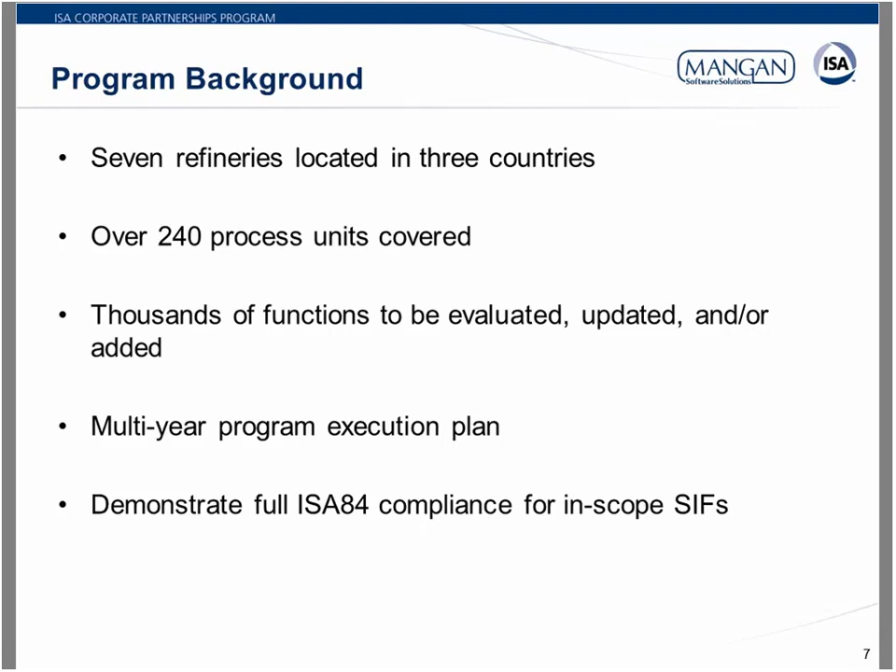So one more piece of background here. One of the things that was immediately recognized with this sort of brownfield program is that you already have a lot of safety functions. Many of those functions are not originally designed to ISA84. Other functions may have been originally designed to ISA84, but perhaps have not been maintained per life cycle requirements. And so it's a challenge to know how to start, how to take the first bite out of the elephant, so to speak. And so we landed on a 2-pronged approach.

Phase 1 we'll call operate and maintain phase, and phase 2, which is the capital program. So the idea of the phase 1 operation is to set up that sustainability organization and establish the work processes that are going to ensure long-term success. And then once those organizations are established, start ensuring that the existing functions are documented and tested, and start gathering prior use data to demonstrate that we are meeting minimum safety requirements.

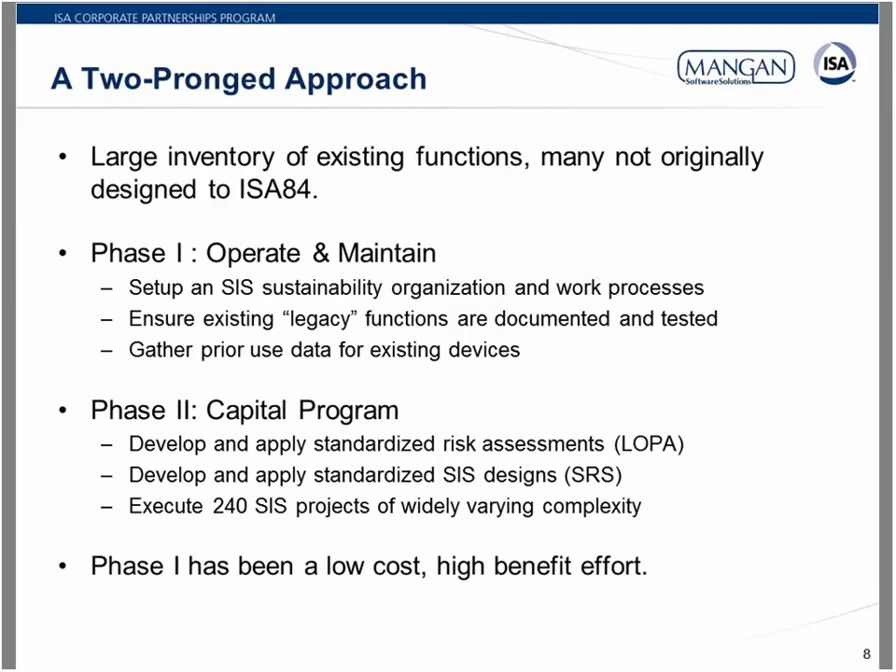So we will see that when we look at the tool that was delivered later on in the presentation. Okay, thanks, Alaric. So with that, we're going to move to our first poll question.

So Alaric. All right, folks, now that we've kicked off the presentation, we kind of want to calibrate ourselves with the audience and kind of clue ourselves into why everybody dialed in. And certainly we appreciate you joining us. But for this first question, we want to poll you to see if you are undergoing a similar safety lifecycle journey. So please select whatever option applies for you there.

And where applicable, is or was your experience in terms of greenfield or brownfield projects? So we'll just take a couple minutes here and let you guys answer those poll questions.

So rather than sit here in silence while you answer the poll, I just wanted to add that for those of you that want more information on this, Chevron did a presentation of the overall program at last year's ISA Safety Symposium, and that's available on the ISA website.

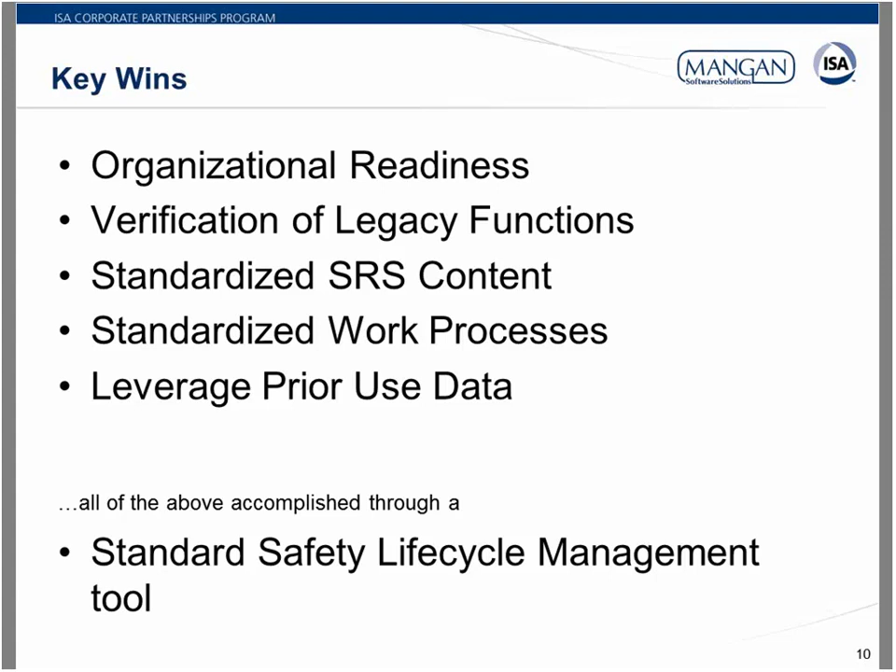So starting off, design of the SIS organization. So one of the things that we recognized early on was that the skills of SIS testing and maintenance are not the same as basic E&I skills. For example, knowledge of common mode failures, the importance of proof test coverage, et cetera. These are not things that are in the basic E&I toolkit. And so the first step for us was defining these required skills and competencies and starting to track them.

And to facilitate that, we created designated SIS O&M coordinators at each site, and also SIS engineers, and then a dedicated SIS group reporting to the M&R organization. And then subtly but very, very importantly, originally many of these teams were based out of technical organizations, which with the history of SIS, it kind of originated out of technical organizations, and that knowledge has stayed in the technical organizations.

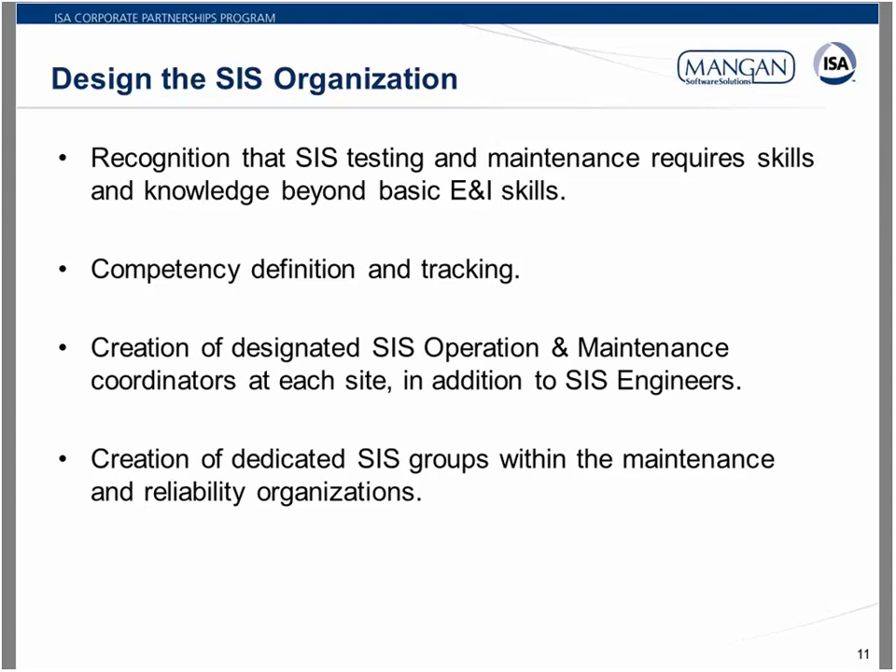Verification of legacy functions. So I started off earlier by stating that we have a large inventory of existing functions, which we just generically call legacy instrumented functions. Many of them are clearly safety functions, although they may or may not have a formal risk assessment to back that up. Others, it's unclear whether there should be safety functions, and we await a risk assessment to back that up.

And so ultimately, the first problem is simply to record all of these protective functions and document them as carefully as we can. And only then, after we've gathered the data, can you make a decision on what happens to that legacy function. Options being to grandfather the function, to replace it, or ultimately to decommission it.

And one of the challenges that we faced with our centralized program is we need a standard process to ensure that, number one, we're making the right decision on these, and number two, that we're making the same decision from site to site in a consistent and efficient way. And then in the interim, we have the problem of how do we do our due diligence to make sure that we're providing adequate safety. And one of the key questions there is about testing frequency.

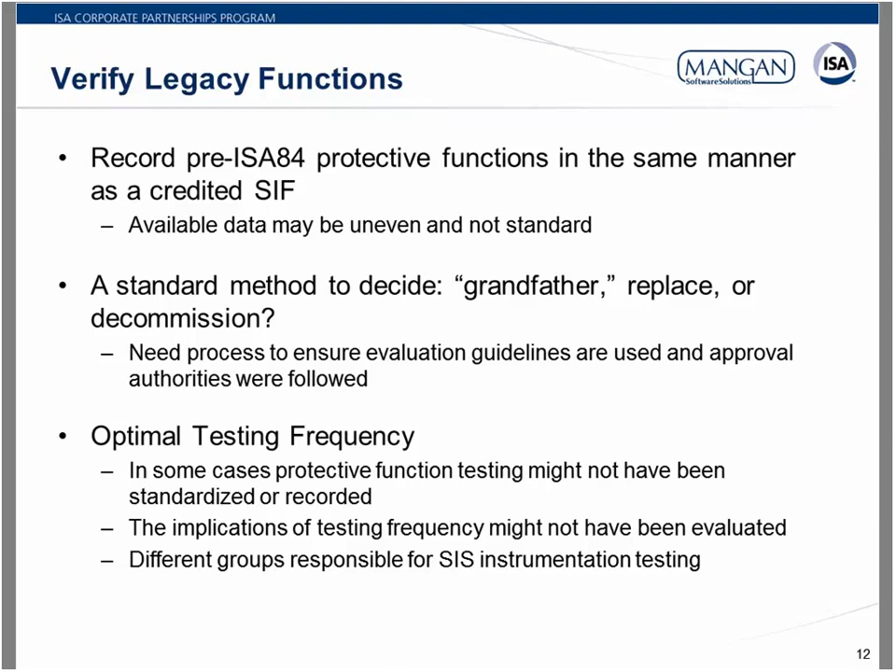The next challenge we faced was what does an SRS look like? And for anybody that's worked on a safety requirements specification before, you already know that frequently an SRS is not a single document. It's multiple pieces of information that could live in multiple systems. Many of these systems are really outside of the scope of control of the SIS engineer.

The example I give here is P&IDs. Obviously, the P&IDs are an important reference for the SRS. We want to ensure that if the P&IDs change, that it stays consistent with the SRS, but we simply can't take ownership of the P&IDs. It's out of our control.

And you could go on and list many, many other items in here, from cause and effect to loop diagrams and so on. And so what you need is more than a document, but a way to integrate all of the required information into one place. And beyond that, we want it integrated in a standard way.

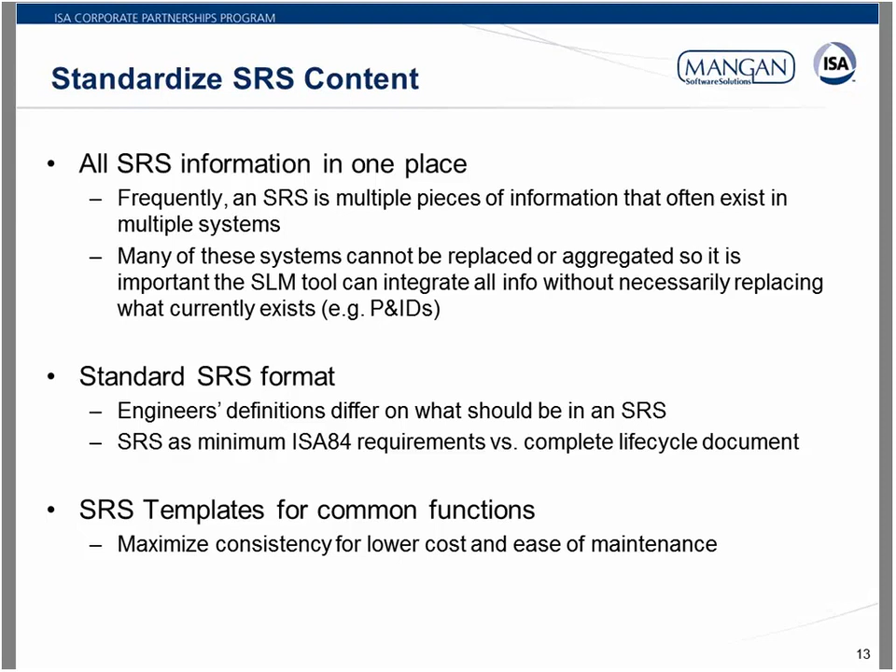Thank you, Alaric. As I hinted at on the previous slide, something that goes hand in hand with the standardized SRS are the standard work processes to support it. And I think this is one of those aspects of life cycle management where many organizations fall down. A big part of the ISA84 standard is about the required verifications and functional safety assessments that have to be performed. And obviously we want to perform those in a consistent way that will allow us to demonstrate compliance years after the initial project.

So the key requirements here are we're looking for a structured method. We want every verification and every FSA to cover the same minimum items, to have the same structure, and to have the same, let's say, the same types of participants. They're required participants with required competencies on these work processes. And then finally, we need that standard revision tracking and approval flows to make sure that the system that we set up initially continues to be followed in the long term. And then to audit that, we have a deviation process to support that.

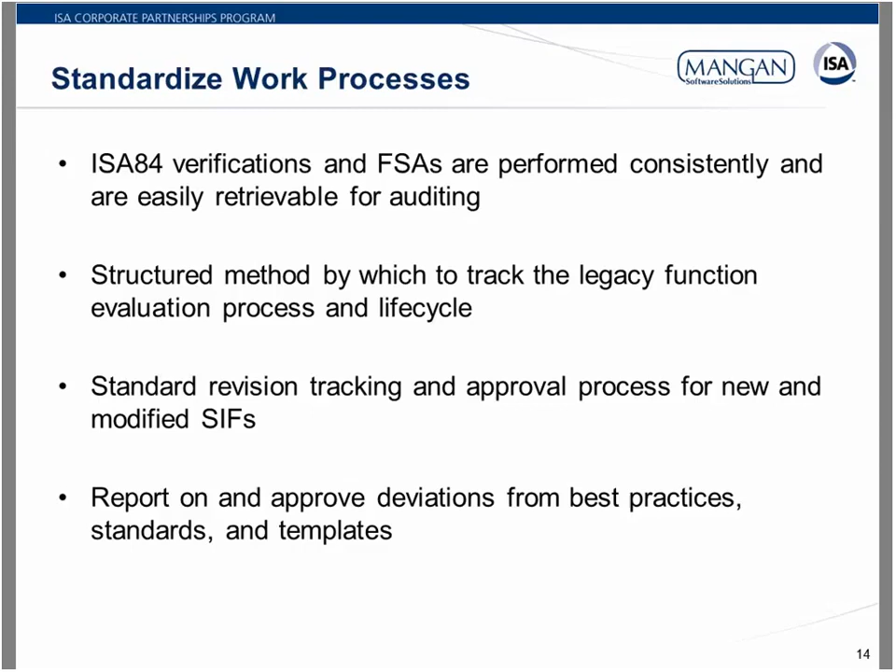So I feel like now that we're doing the presentation live, I've just been laying out a laundry list of problems for the last 10 minutes. So this is the last slide of problems, and then I promise that we're going to get into solutions shortly. So finally here, prior use data. It looks so easy, but it's not.

What we found is that even if our operations and maintenance organization have been performing testing, there's no mechanism for collecting and analyzing that data. It may go into a maintenance management system, it may go into a file cabinet, but one thing it definitely doesn't do is magically transform into prior use data for SIS engineers.

So we need a standard way to group and categorize devices, because prior use data applies to specific devices in specific services. We need a standard way to analyze the data and approve the data. And finally, the overall process needs to be as automatic as possible, because experience tells us that if gathering prior use data is hard, it likely just won't happen. And so why do we want this? Initially, of course, we want more accurate SIL calculations.

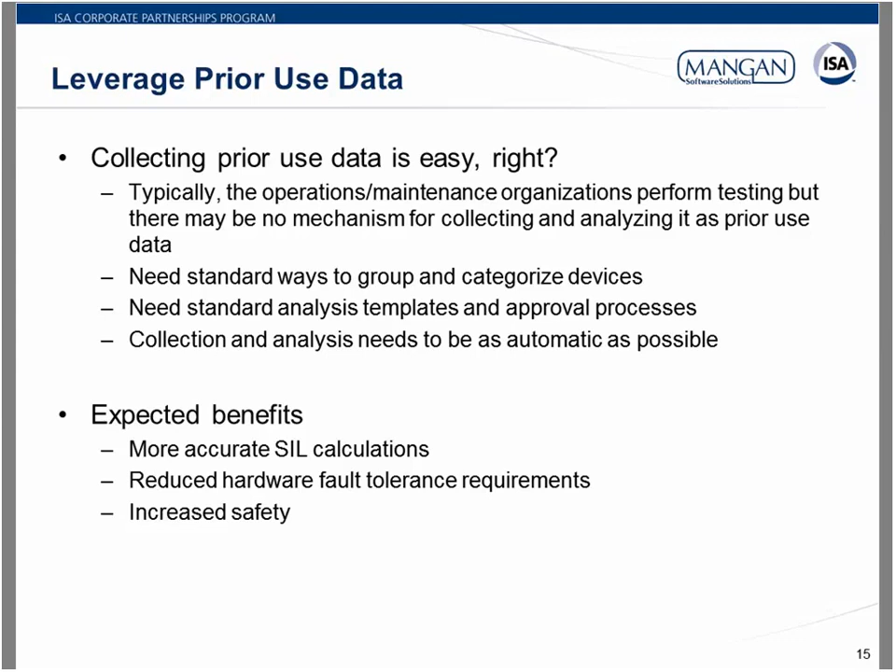So Alaric, any comments here? No comments here. I think we can press on. Okay. So now we are going to move into our second poll.

Go ahead, Alaric. So speaking of a laundry list of problems, with this next poll, we do want to understand for the audience which of the previously mentioned aspects are most important to you. And with this one, please select all of those options that apply. What we hope to see with that first question is, are we far off the mark? Are we chasing the correct targets here, with regards to your opinion? Stephen and the leadership at Global Manufacturing, they've come to the understanding in speaking with other SIS leaders that they are, in fact, not alone in worrying about these various topics.

And then for the second question, I want you to think about how many different databases, systems, or programs you require to demonstrate this standards compliance. For instance, where do you keep your loop drawings? Where do you keep your logic solver programs or calibration certificates? My suspicion here is that if you really map out where these things live in your organization, we'll see those responses creep higher to the 3 or 4 or greater than 4 options. Yeah, and quite honestly, I don't want to influence your responses, but I'll be very surprised if a lot of people say one system, because what we found is the reality is that's just really hard. You're always going to have to live with multiple systems that will have to work together.

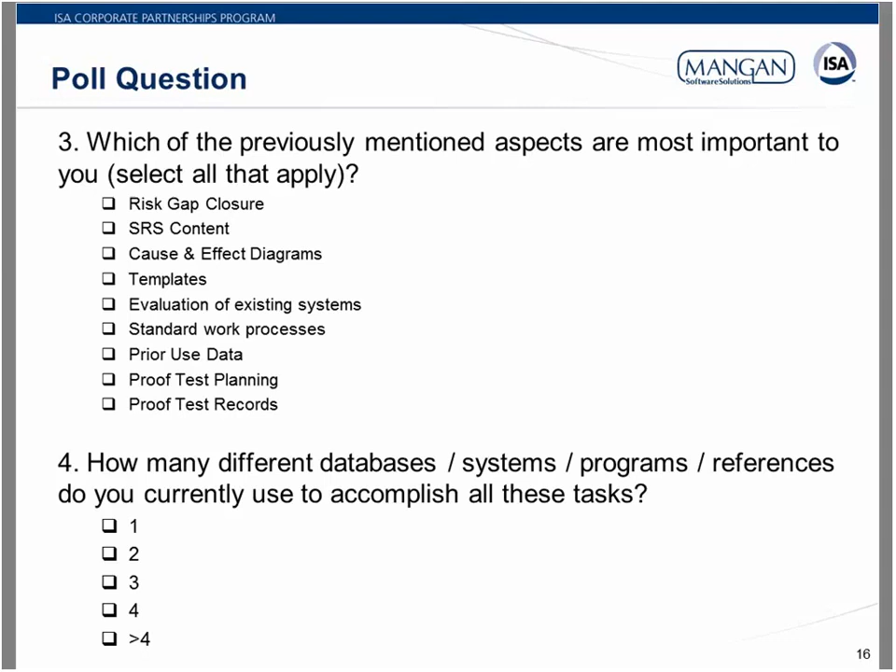So since we're running a little bit behind, why don't I move to the next slide while the poll's still open, and Alaric can give the overview of the next part of the presentation, then we'll come back to the poll results. Okay. Oh, they just popped in.

So take it. Okay, well, I'm scanning the results on question 3 there, and we're seeing greater than 30% indication for almost every one of those options. And it looks like option D there, which is templates, has the lowest response rate. Kind of interesting. We have a couple slides on the use of templates. Maybe we can change people's minds there. But certainly the highest one looks like the evaluation of existing systems. Yeah, that's interesting to see and makes me feel good that it's a common problem. Everybody's in the same boat, and I think we're going to show in the next section some powerful ways to manage that process.

And on the templates, it's too bad that we can't elicit responses, but I wonder if the templates are not so important to people because a lot of people already have them. That's based on my talking to people at other companies. The templates have been around for a while in some form or another, and so I think what's a little more unique for us is the focus on the overall life cycle and taking our existing functions and bringing them into compliance. Agreed. And the other one that jumps out to me there is the 56% response rate on SRS content.

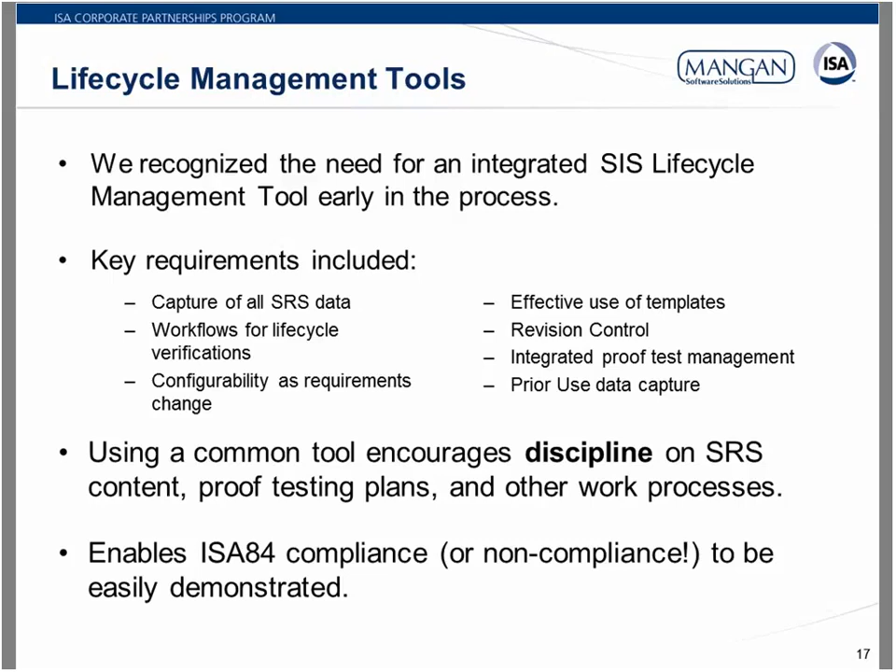And in our case, we started with a week-long conference room workshop in which we gathered global manufacturing's corporate and technical leadership, the refinery's SIS coordinators, and the organization's IT project management, along with our team, to review the program's key requirements and then really talk about the nuts and bolts of how to achieve them. Right, so our discussions ranged from database structures to SRS formats and anywhere from project workflows to application hosting.

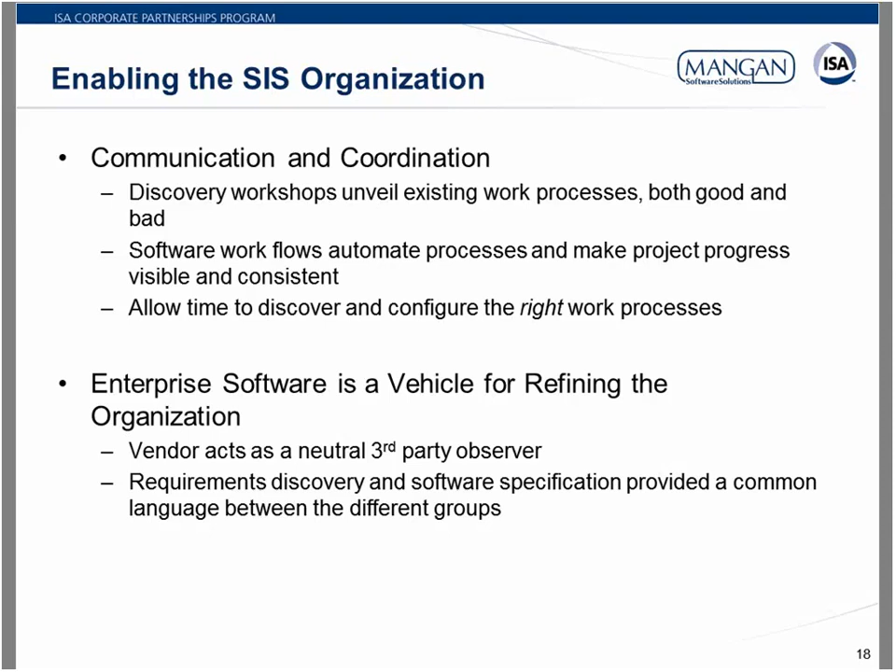Any other comments, Stephen? No, I think we can move on.

Oh, yeah. Although I call it a day in the life of an SIS organization, it really illustrates how we mapped the life of a safety function from conception all the way to decommissioning.

Somebody is not on mute.

But again, before I proceed, I want to deliver a sense of scope. Through the discovery process, we took what was effectively 1 page of requirements, and Stephen and I and a couple other members of the organization mapped it into 10 pages worth of workflow. Now, we don't show it in the presentation, but all of those software touch points identified in the workflow eventually became 73 pages of software requirements.

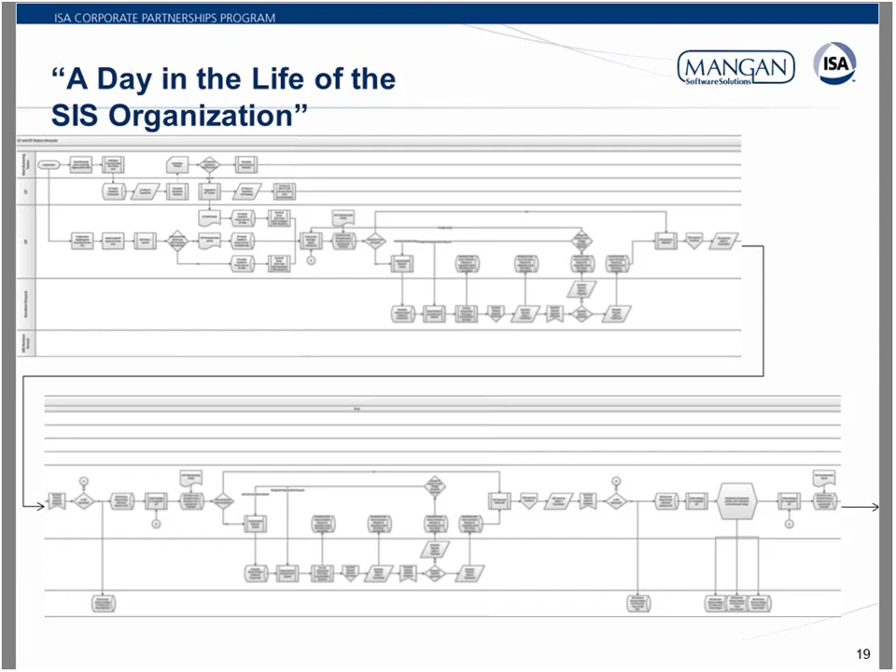Right, so the lesson learned should be this. If you can't diagram your work processes at this level of detail, you won't be able to configure them into the software and get the tool that'll help you along the safety lifecycle journey.

And then the 2 of those, plus myself, share a staging instance which acts like a sandbox, really, in which either group can test new configurations for the software. Now, providing the separate instances, I hope you understand, is an elegant solution to handling the 2 distinct yet parallel program workflows within that safety lifecycle journey.

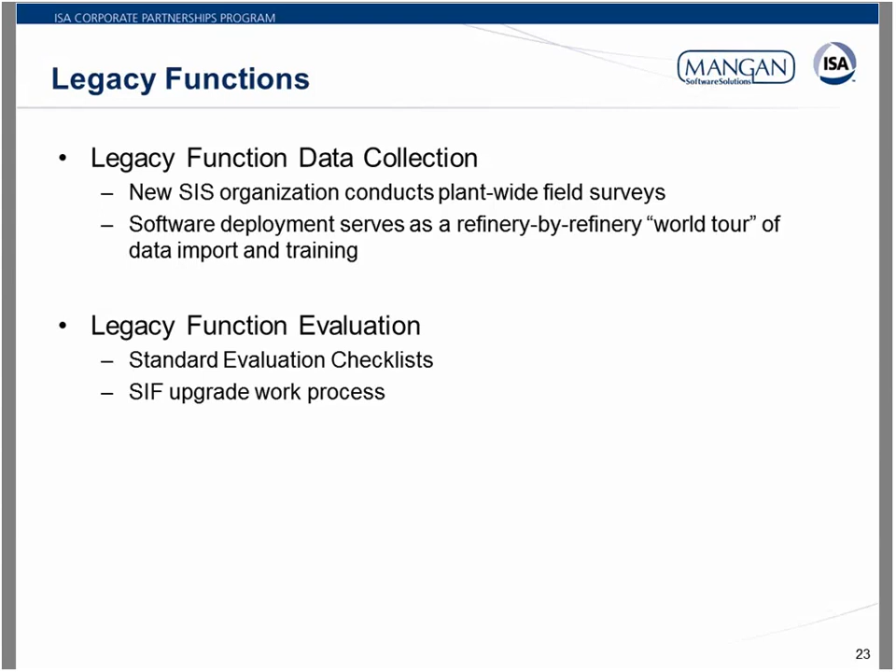Now that the data was all in standard form, it could be put through an evaluation process. So on the next couple slides, we'll talk about the use of evaluation checklists and then what we call upgrade or decommission workflows that are made available in the application. All right, so we're going to zoom in a little bit on our lifecycle workflow and just want to point out that the initial phase 1 efforts occur at the very beginning.

And with this screen capture, I want to show you how we configured the application to handle legacy function data in what I call an SRS-like manner. Now, as Stephen would say, the legacy function itself is just an interim state. The organization doesn't intend on keeping legacy functions as they are. And instead, on a function-by-function basis, they're going to make the determination whether to keep and take credit for or otherwise decommission the function. So it makes sense then to organize the legacy data in a manner closely resembling what it might become, such as the safety requirement specification structure like you see here.

And again, I want to stress the degree of adaptation involved. My team and I changed a software platform used primarily as a compliance tool to, in this case, accommodate admittedly pre-compliant data entries. Stephen? Yeah, that's a good point, Alaric.

We should emphasize that the legacy function from a software perspective was a new object that the system had to learn how to deal with in a system that dealt with SIFs. And one other thing I'd like to point out is we say SRS-like data. Specifically, it's a subset of the SRS data because, as Alaric said, the LIF, the legacy function, is just a temporary state. It either eventually becomes a compliant SIF or it's decommissioned.

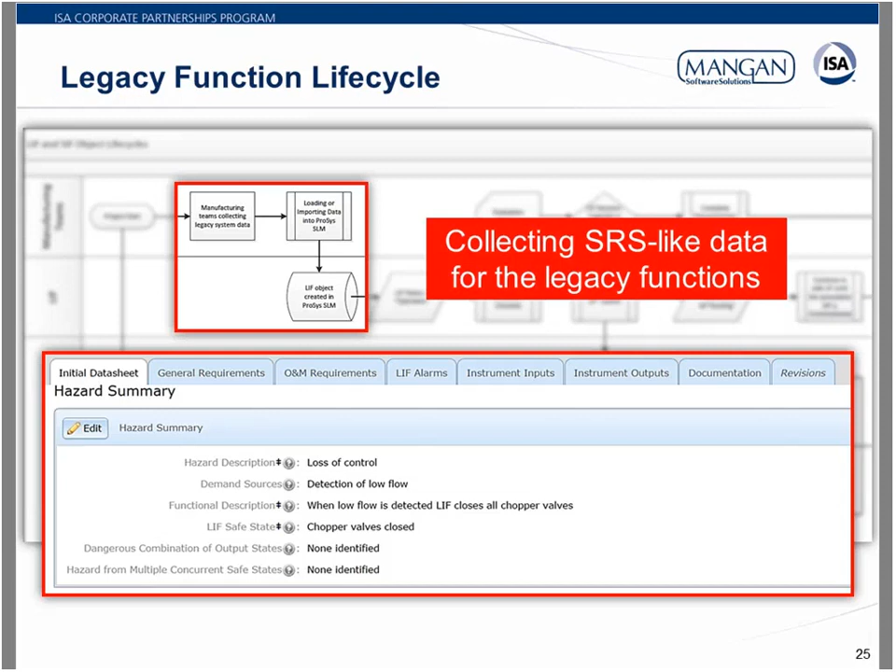So rather than reinvent the wheel, we simply took a subset of the data that you would expect for a compliant SIF and used that as the basis for our legacy function documentation. So on this next slide, we talk about what happens to the legacy functions while they're being evaluated in that interim state, right? And this is such an important key requirement stated for the organization that I'm actually quoting a senior member of the global manufacturing team with that slide title of Test Baby Test, right?

Now, here again, you'll see the benefits of employing a common software tool across an organization like this, where testing procedures or frequency may not have been previously identified. The Phase 1 teams could now specify nominal testing frequencies and establish some form of standard test procedure across the enterprise.

Now, standardizing test procedures was one of the expected positive outcomes of the effort, but as the refinery SIS organizations adopted the software platform and really started taking ownership of SIS testing, which in some cases was for the first time, they opened the door for further management discussion, and then really started asking questions like, how do we record demands? How do we approve or manage bypasses, right? So you kind of see here that they're starting to formulate the management of the operate and maintain phase of the safety lifecycle.

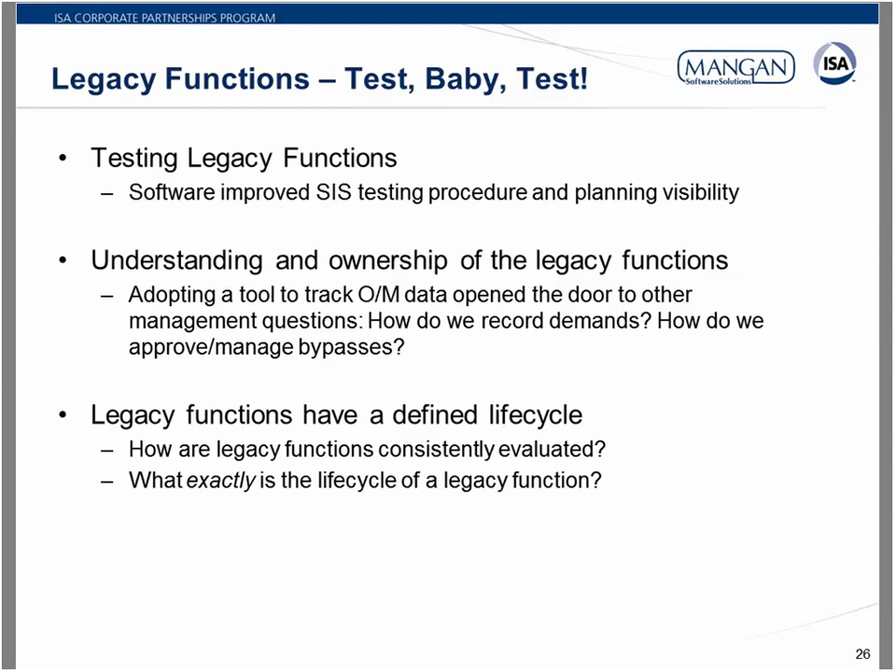And what this is representing is the next leg of that, where we found that it was very effective to raise the visibility of those data metrics, and now we're making the effort to make it more automatic, more reproducible, and more likely to last into the long term. Very good. Thanks. Very good points there. So in a couple of slides, we'll address where the life cycle for a legacy function eventually goes. But first, on this next slide, let's take a look at the outcome of this initial effort.

All right, so this slide shows a screen capture of what we call the operate and maintain module out of the SLM software, wherein you see the collection of test groups, or you could think procedures, and an example list of the legacy functions covered by that test. And just as a quick note, all of this information has been made anonymous for the presentation.

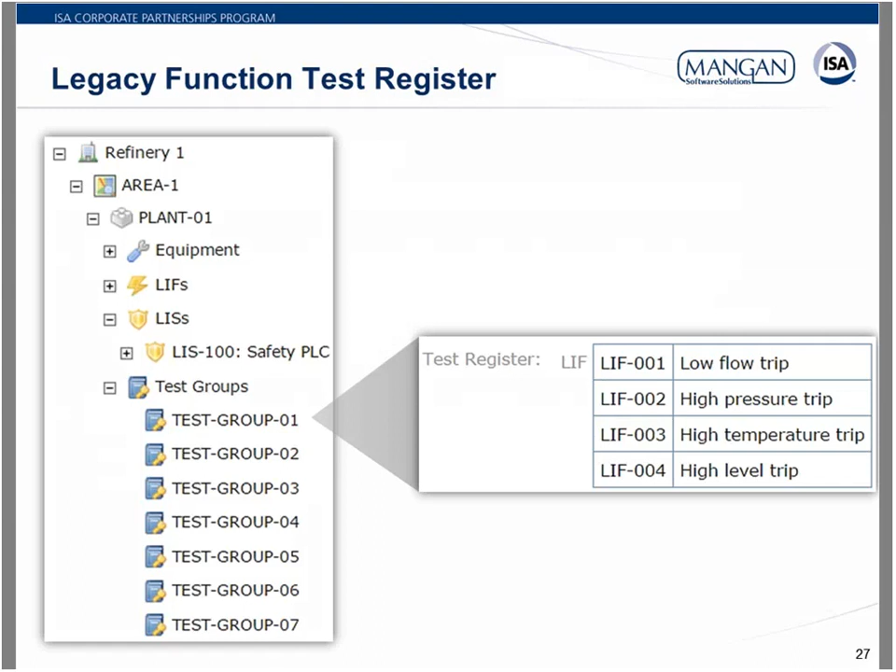Now at this point, the Phase 1 refinery teams have recorded in very standard form the legacy functions that are in place. They've kicked off an enterprise operate and maintain program, and now it's time to move forward in the evaluation of legacy functions. So I would just like to very quickly add here something I should have mentioned earlier.

If we have a legacy function in place and we are shooting for full ISA84 compliance, that doesn't necessarily require a rip out and replace of what's there. In some cases, compliance is a paperwork exercise to make sure that your documentations and your procedures and your verifications and validations have been done. And in those cases, all of the work for defining test procedures and gathering data for the legacy functions is immediately transferable to the ultimate compliant SIF.

You got it. Very good comment there, because as we move along the program workflow, we actually get to those steps and sub-steps which drive what I call the final determination of a legacy function. So we're going to be looking in on some closer points in the workflow.

Right, so as Stephen kind of alluded to, that final determination begins with the completion of a 21-item evaluation checklist, which you see represented in the screen captures from the software here. And again, I did blur out the individual checklist line items to protect their evaluation criteria.

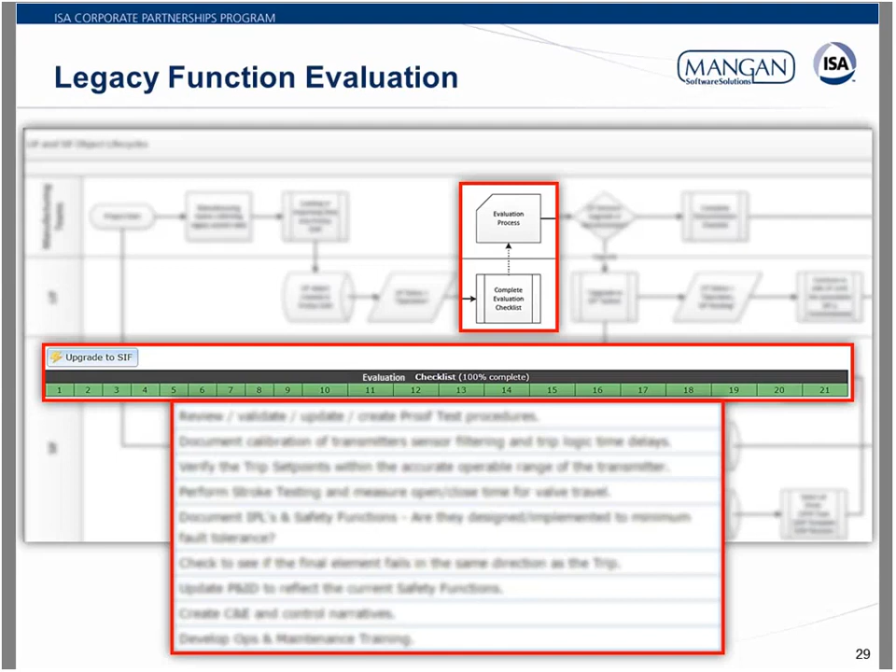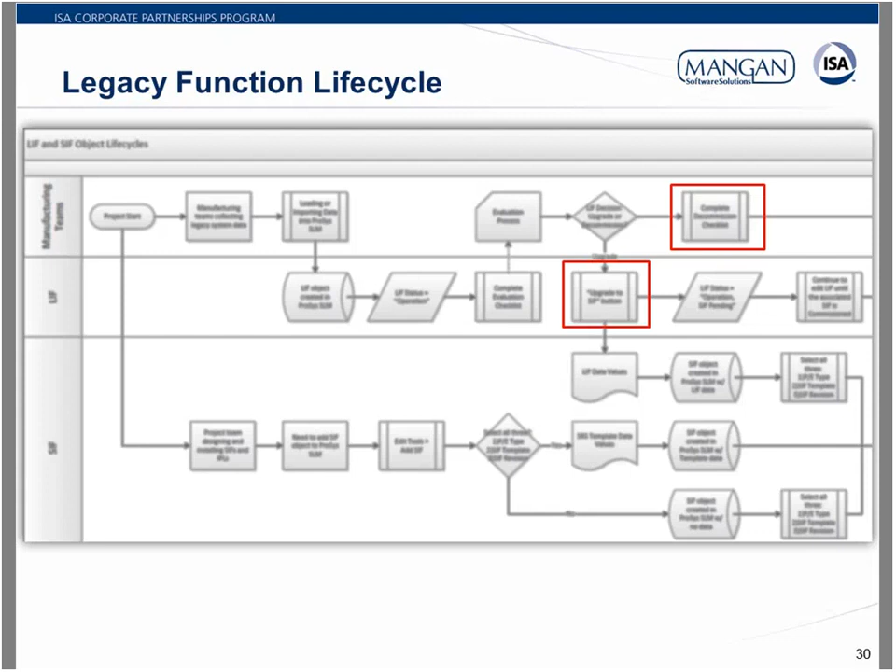Right, so as we move along this lifecycle workflow, you see there's a couple different paths that we can follow and lead towards the eventual end of the interim state, which is the legacy function. Right, so zooming in here on the workflow, we have ultimately two options for resolving that legacy function. Number one of which is considering the function creditable and then eventually ascribing some SIL level to it. Right, in the software, this involves a workflow to what we call upgrade the database object to a safety function.

Path number two would be to take no credit for the function and in some way, shape, or form decommission it. Right, in the application, this would archive the functional data that had been built up to this point. Now, either option involves workflows which are managed by stage gate checklists in the software, which you see in these other screen captures.

Now, you don't see the application logic in this section of the workflow, but in those instances where a legacy function is upgraded to a credited safety function, we tied the commissioning of the ISA84 compliant function to the subsequent decommissioning of the related legacy function within the database.

Like Stephen said, some of the equipment may remain, but at least in the database we make that change. So this creates a figurative switch that gets flipped between the pre-verification function in phase one and the ISA84 compliant safety function verified by phase two.

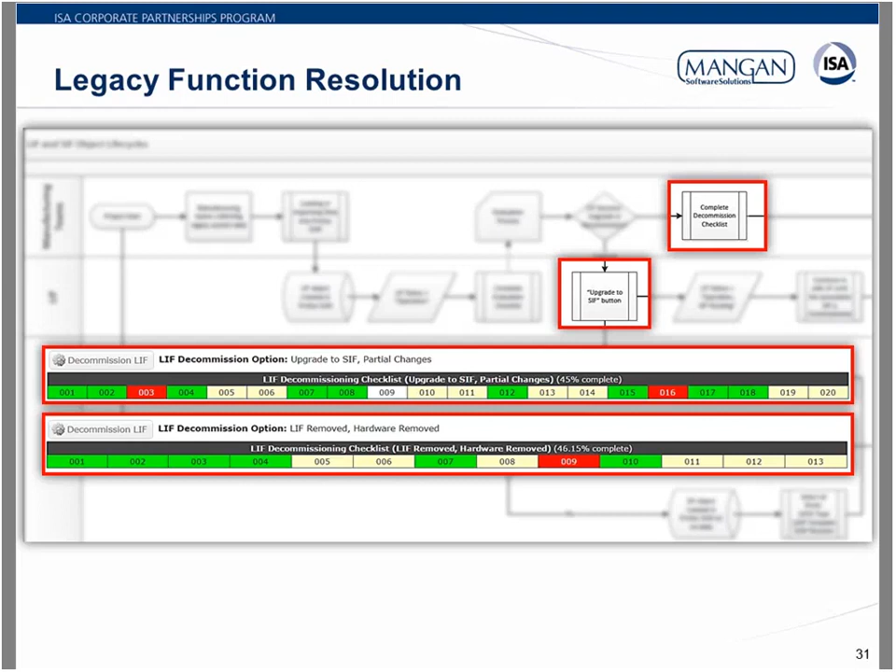So we've run the legacy function to its quote-unquote end, and that's where we can talk about the phase two activities. Phase two begins with the development of what we call SRS templates, and then continues with the specification of the project SIFs. This is done in the separate phase two instance, where you see a different mentality. The phase one team is working with what they've got, so to speak. In this case, the phase two team needs to achieve consistency and efficiency, which Stephen mentioned earlier, and that'll be through the standardization of SRS content.

We supported that effort by configuring the software application with features like custom fields, workflows, reports. We'll talk about some of those in the upcoming slides. But what's also important is the creation of what we call enterprise templates, defined by the central engineering team to provide a baseline of standard data which speeds up the development of actual SIF SRSs.

And this is where Stephen mentions the approximate 25-to-1 leverage in creating the thousands of project SIFs during the program. We're also going to see how Phase 2 reports on SIF deviations can be created based on these standardized templates. Stephen, any comments? No, let's move forward to the example.

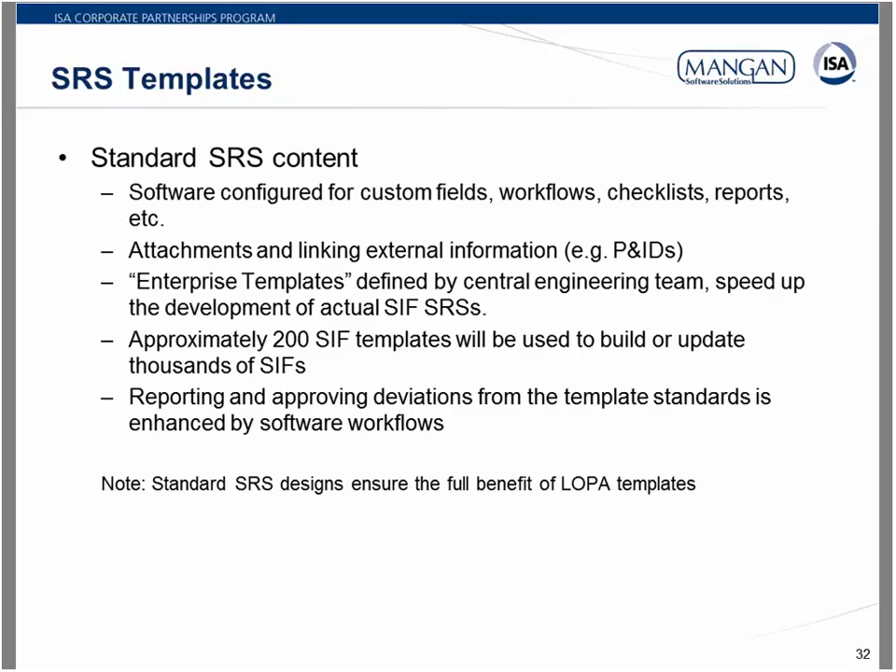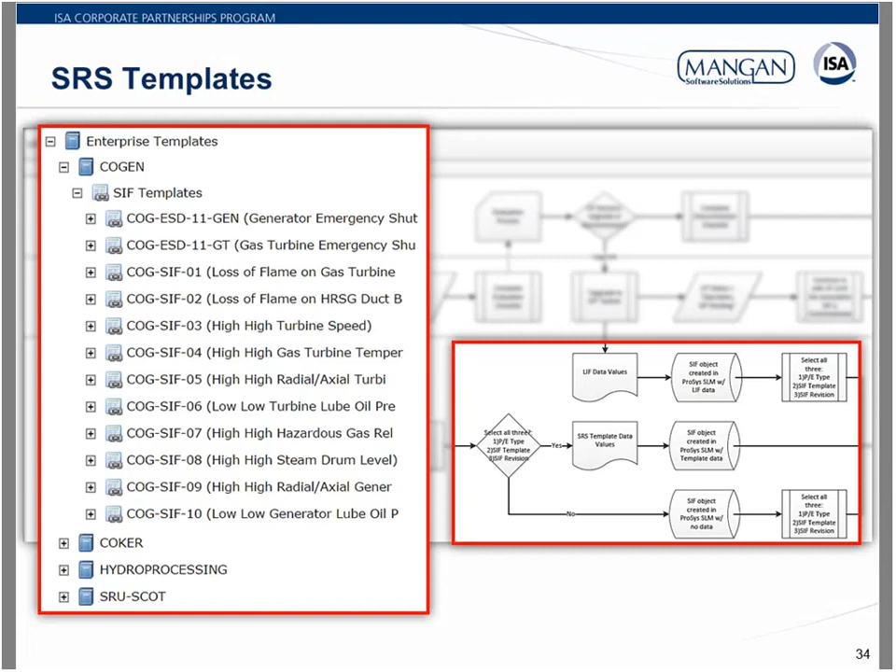So I'll just briefly add on this slide that this is all about consistency and efficiency. When we're talking about 5,000 functions, even if I only get the templates half right, that's half my work that I've reduced. And beyond that, we'll talk about the importance of consistency and how we're helping to ensure consistency in some of these later slides.

So at this point we've established the SRS templates and described how they are created in baseline form. So we need to look at the further development of safety functions. In particular, we're going to talk about how deviations can be handled, deviations from those templates.

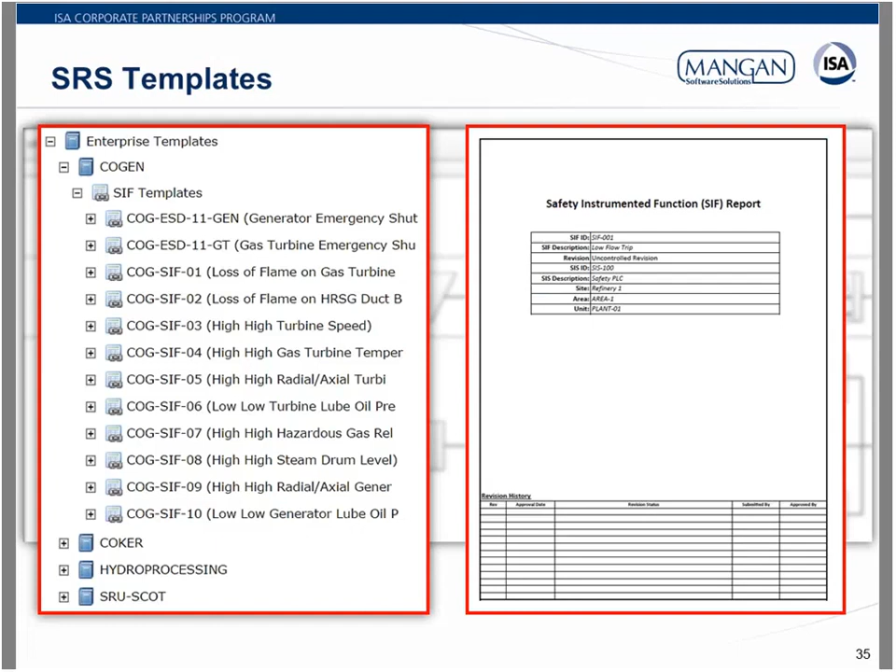And just important to note here that that deviation reporting and approval process is another one of those what I call elegant solutions to replace what was originally a paper-based and manual process when Stephen first envisioned it. So I would just add on this quickly that I want to emphasize that this is item by item, data point by data point.

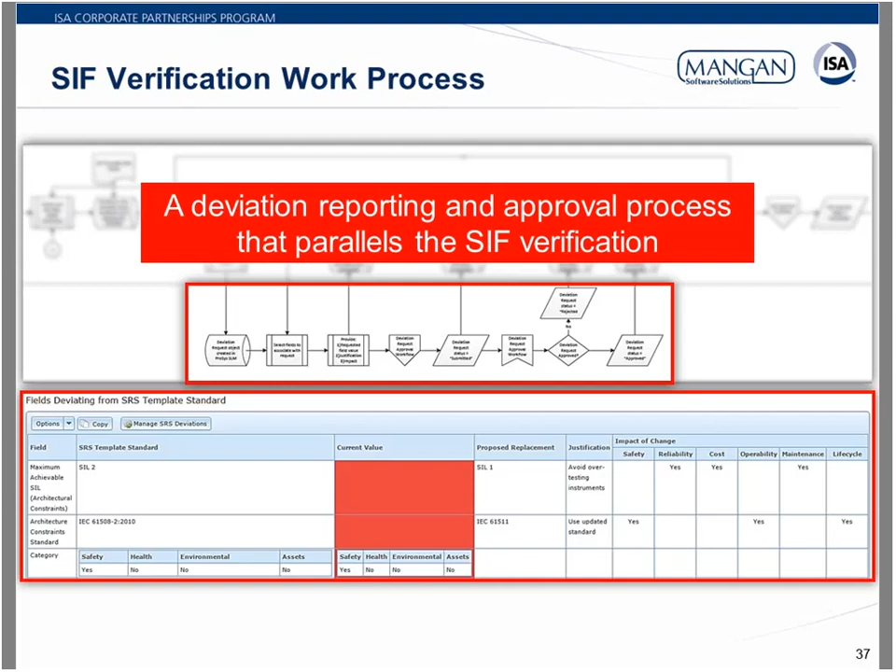So this is very important to the 41% of you that have more than 4 systems that you're using for compliance, and this is a method for you to link into those systems, because you can link to whatever kind of document you want, and have the ability for the software to verify that the documents you're linking to actually exist.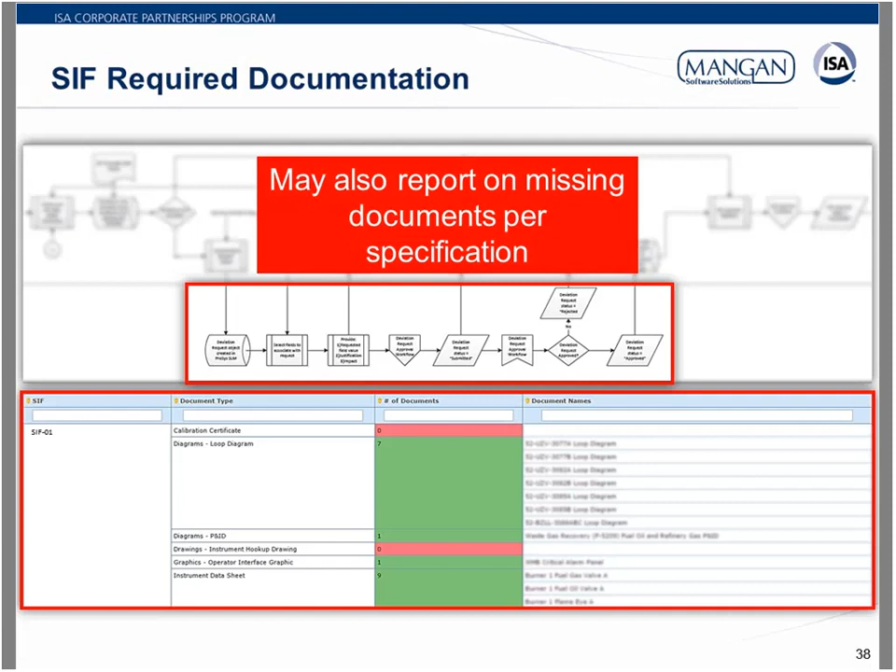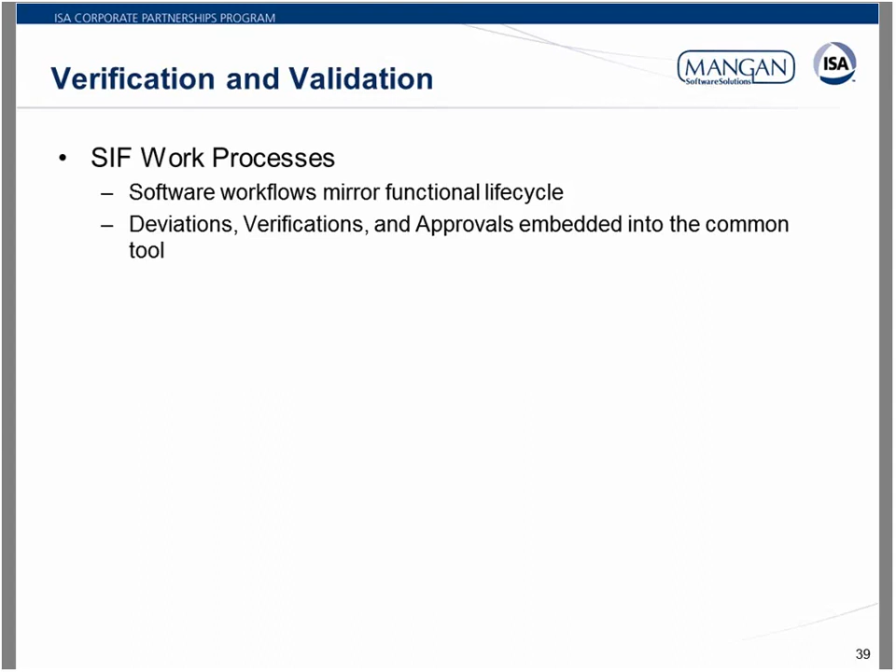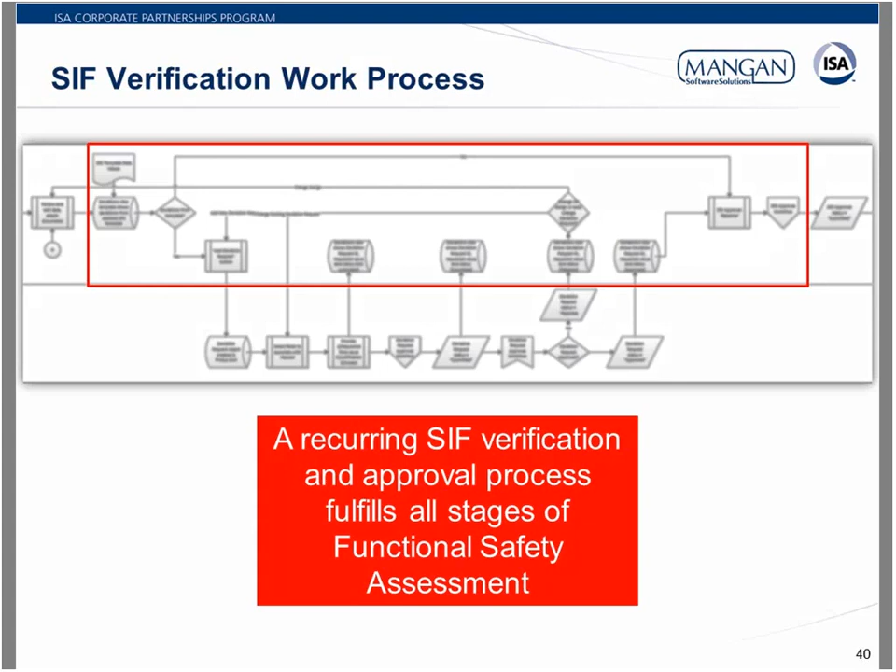Got it. So up to this point, we've been talking about various options like the application of SRS templates, deviation reporting, linking other documents, all of which build up to the functional verification of these safety functions within the life cycle. So let's jump into how that works. So to meet Stephen's needs, we designed a recurring SIF verification approval process within the software. I'm just going to zoom in on this, where you see those steps summarized in the screen capture at the bottom of this slide.

Right? These are the project approvals we configured for global manufacturing, which mirror their capital project stage gates. So you'll see that the life cycle starts with the baseline version of SRS, then moves on to initial SRS and continues up to installation, commissioning, and eventually decommissioning. Now, I call it a recurring approval process since at approval, we end up saving the safety requirement specification for that project stage, but the functional data within the database remains evergreen as the Phase 2 team moves on to the next stage.

And you'll also see here, though I've blurred it out, at the commissioning step, the software has a couple conditional logic requirements, right? These are going to correspond to status within the associated legacy function, if applicable, and the overall approval of the SIS for that particular unit.

So why is this important? I would say we probably didn't realize its importance initially. We actually had various stages of the SRS defined in our SIS standard, but what we realized as we were working through the work processes was the reality was we live in a project environment. So even more important than the SIS stages are the project stages.

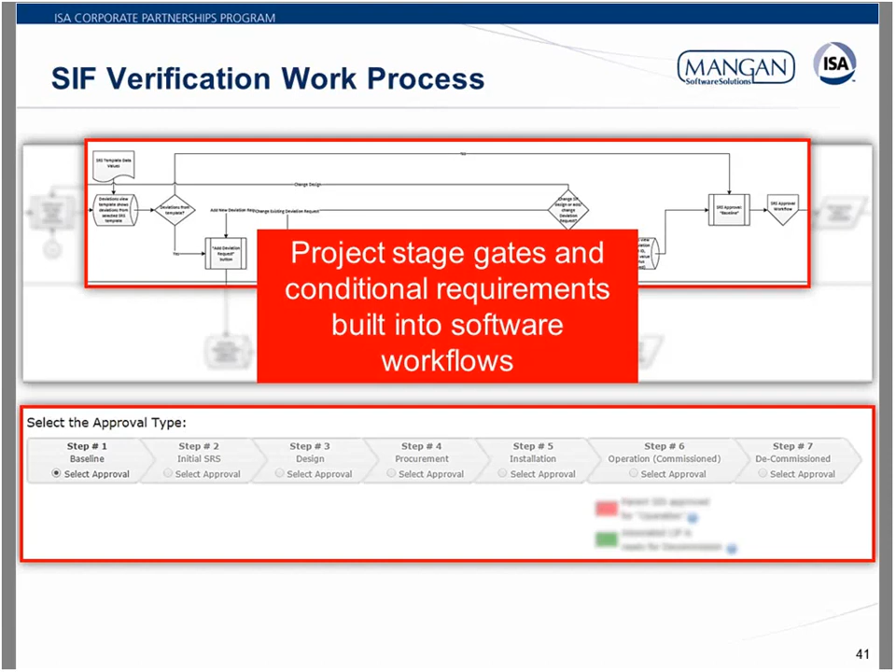Right now, that's the final piece of the safety life cycle and the final part of the software integration that we wanted to cover in the presentation. From this point, the several other remaining pages of that workflow deal with the continued operation and maintenance of the safety functions. And it does lead all the way up to eventual decommissioning, but we have time for just one final poll before we move on to lessons learned, so let's take a look at it.

Right, so to kind of wrap this up, we want to ask folks, do you apply LOPA or SRS templates? And then for those that apply templates, assuming you manage deviations from them, that's part of the point of having templates, how do you do so?

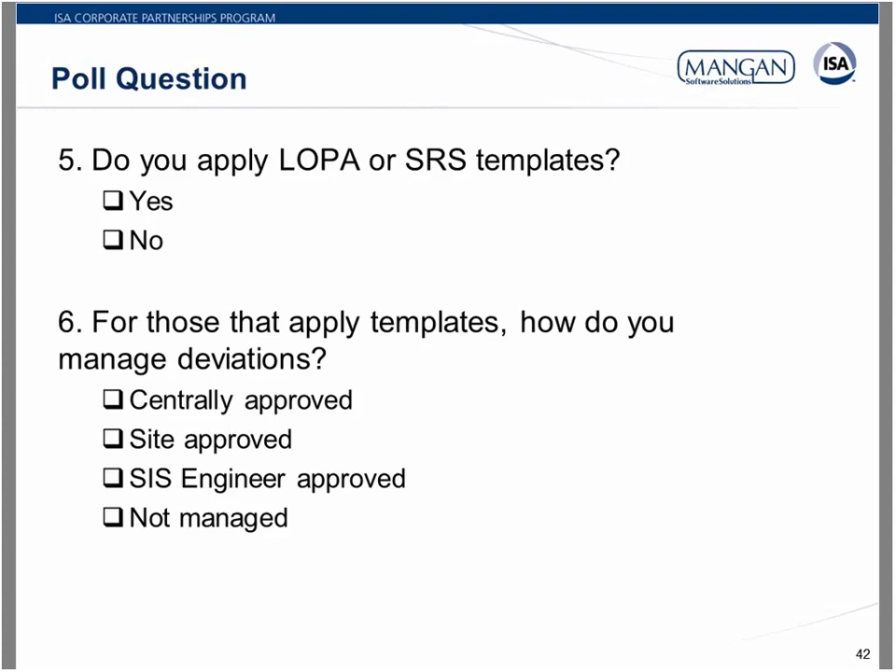Speaks a lot to the organizational discipline, and that kind of takes us into our final slide, which is lessons learned. So Stephen, you want to kick off here? Well, I think I may have covered a couple of these things already, but specific lessons. Establish and communicate new conventions early and frequently.

This is really part of that discovery process that we talked about, which in our case was several months and was certainly not linear. We had workshops. We came up with new conventions, which prompted more discussion, which then got worked in the next workshop. And you have to allow the time to let that develop in an iterative fashion.

Defining reporting requirements before workflow steps. Let me let you talk about this one. Oh, that's definitely in my domain.

So this is where, in particular with the Phase 1 group, they were more keen on really defining what their next action should be. And it was an uphill battle for me to keep them focused on the longer-term desired end state and kind of keep them in line with the Phase 2 personnel.

And then part of that feeds into the next bullet there, which indicates to iterate on a design freeze basis with the software, where, again, with the Phase 1 personnel, but also in terms of Phase 2, a lot of those approval steps, we could have done probably a better job in terms of iterating on a defined desired end state, and then doing a hard look at it and saying, is that really what we want to come out of the software application when it's all said and done?